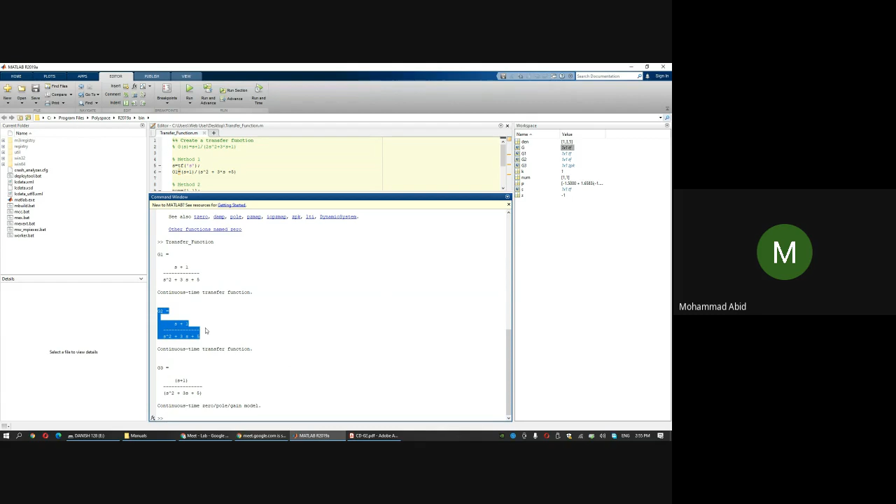If I run this, you see G1 using method 1, again the same transfer function using method 2, which uses the coefficients of numerator and denominator. And another transfer function which is again the same, but this time using a continuous time zero-pole-gain model, meaning I gave MATLAB the information of zeros, poles, and gain. Then I used the command ZPK, and MATLAB created a transfer function named G3, which has the same numerator and denominator coefficients.

You can also see here the variables stored on the right - the gain is 1, here are the poles. If I write P, the poles of the transfer function are complex conjugate: -1.5 and plus minus j something. And there's also a zero at -1. So this is how you define a transfer function.

I have told you 3 methods. One is straightforward for a simple equation, you just need to be careful about the brackets. Second method uses coefficients, and in the third method, if you have zeros, poles, and gain information, you can get a transfer function using that.

So after having a transfer function, you can plot a number of things about the system. Because the transfer function is known, it creates a lot of convenience for us - since the transfer function is known, you can check anything about the system. Let's plot some things.

Let's create some plots for the transfer function, and we can use any one of them - G1, G2, or G3. Let's create some plots to see the various dynamics associated with this transfer function. For that, I will create a plot, but within that plot there will be many smaller plots, so I'll create a subplot.

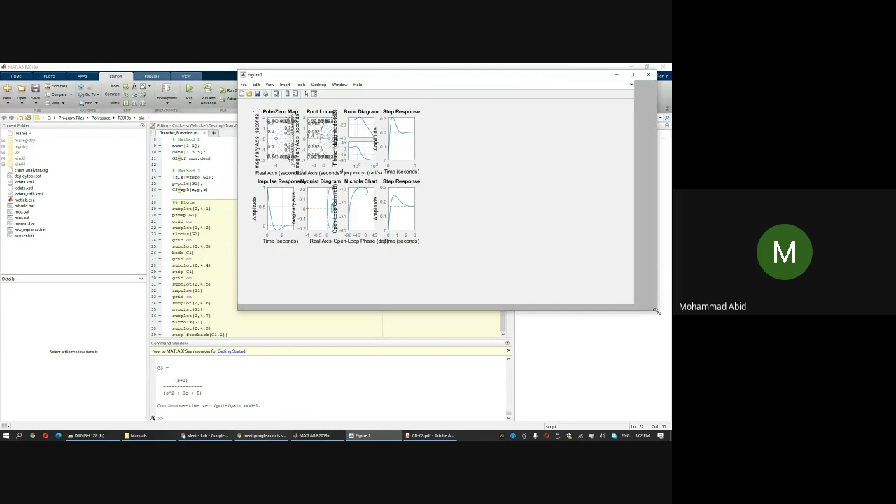Let me just run this first. Now you are seeing basically 8 plots within a plot. I have plotted 8 plots in a single plot, that's why I said 2 rows and 4 columns. See, when you know the transfer function, you can plot a number of things straight away from MATLAB.

I will just zoom it a bit. The first plot you are seeing is the pole zero map, which I had shown earlier - 2 poles are here as crosses, and you are having 1 zero. This is basically the real axis sigma, and this is j omega. So you can see this is the 0,0 point here. MATLAB has plotted the poles and zeros on the complex map.

This is the first. Second is the root locus. Root locus is basically the plot coming from this as we vary the gain k. So this is the locus of the 2 poles. This green is the locus of 1 pole.

This is moving from here, then going to here. Sorry, the locus should start from the open loop pole, this one. Then it moves along this green path and goes to infinity, left infinity. And the second pole, which is up top, it comes down and it's going towards the zero. This is the root locus for varying k.

The third plot is the Bode plot, which we have discussed in lab, of the same open loop transfer function G1. This is the magnitude plot, this is the phase plot for running frequencies.

The fourth plot is the step response. MATLAB has used a step input for the system, and it has plotted the step response. From the plot you can see certain things about the system. This is amplitude versus time.

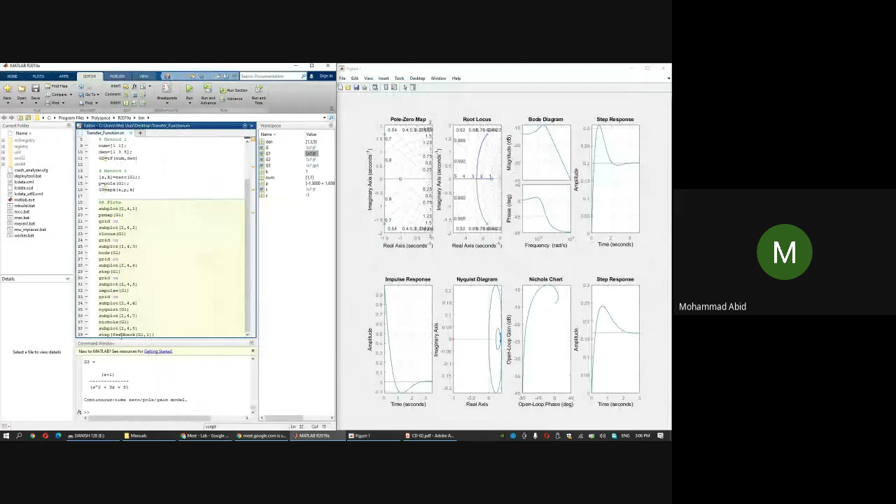It's used like this, feedback. The first argument is the transfer function jiska aapko feedback lena hai, and the second argument is the value of the feedback that you want to give. Yahan pe maine 1 liya hai, which means it's a unity.

Let's suppose aapko feedback mein you're having another transfer function, which is h of s, jo hum likhte hain na in the block diagram. So h of s will come here, and g of s will come here. And by default, MATLAB uses a negative feedback. It provides a negative feedback, but you can change it to positive also. And this function feedback closes the loop.

Aur uska, ye jo maine highlight kiya yahan pe, feedback of, let me just grab this and write it here. This is the transfer function of closed loop system, and G1 was for the open loop system, jo open loop ka tha, with unity feedback negative, it becomes this.

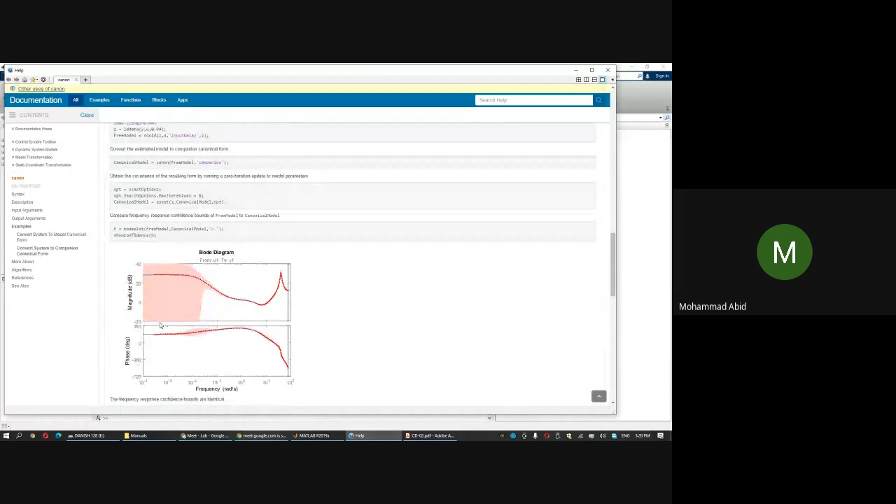And this is the second companion form that I was talking about. Second companion form में diagonal में zeros रहेंगे, sub-diagonal में 1 रहेंगे, and the coefficients of the denominator will be stored on the last column. This is the second companion form, और वही हमने use किया. If you want to extract the first companion form, just take the transpose of A.

Isn't it? So मैंने system 2 बनाया था ना. System 2 was second companion form. And if you want to see just the A, you write the command sys_2.A. This will just tell you what is the A inside the system 2. And if I transpose this, let's say .A, and I just give it a transpose command.

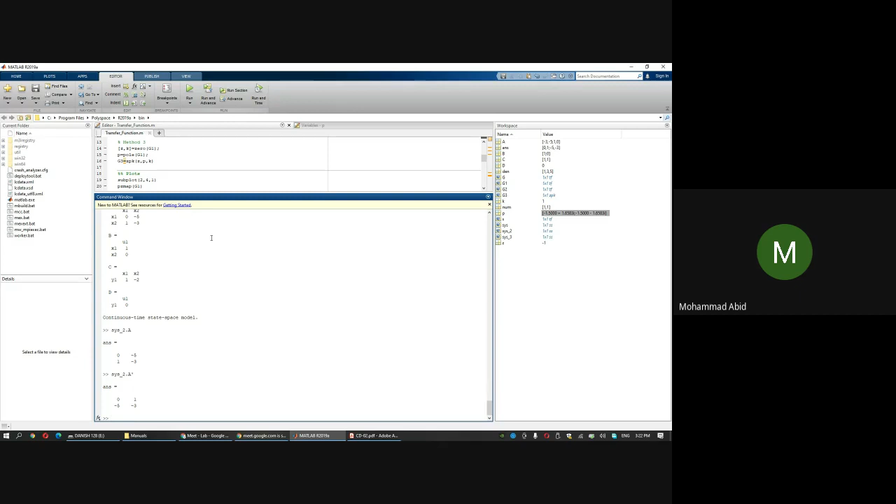See, this is the first companion form. So you have seen this property that first companion, second companion basically complement each other. So you can derive any companion form. You can derive the modal form. और मैंने आपको दिखाया था command for eigenvalues. Simply eig of A. Or if you see a detailed description of this eig command, it not only gives you the eigenvalues, it will also give the eigenvectors.

Its general presentation जो मैंने शायद आपको कभी क्लास में दिखाई थी, this form: [V, D] = eig(A). If you have any matrix A और आपको eigenvalues और eigenvectors निकालने हैं, just use this command. So in V, it will store the eigenvectors, and D will be basically a matrix. और उस matrix के diagonal पे आपको eigenvalues मिलेंगे. V will be a matrix, उसके columns जो होंगे, that will be eigenvectors.

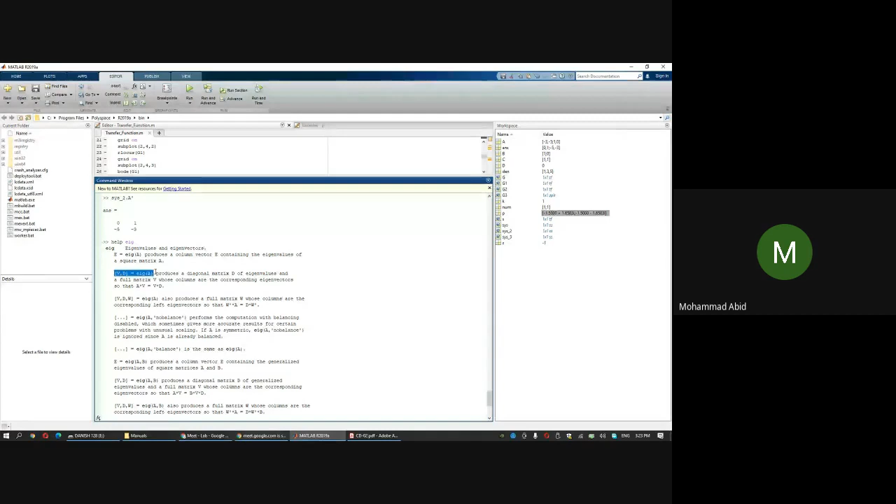And these V, D, and A follow this relation: AV equal to VD. जो हम पढ़ते हैं ना, A small v is equal to, वहाँ पे usually हम लिखते थे lambda v. But mind you, यहाँ पे this matrix vector cannot be producted, इसलिए यहाँ पे V into D लिखा गया है, because both of them are matrices. वहाँ पे lambda is a scalar, but यहाँ पे lambda is stored in this D. Let's suppose we use this command, मैंने ये command copy कर ली.

See, जो V है, the first column is an eigenvector corresponding to this eigenvalue, जो कि pole है पहला. और जो दूसरा column है of this V, that's another eigenvector corresponding to this pole. In theory, we write this D as lambda, but MATLAB stored it as a matrix, and the matrix के diagonal terms में eigenvalue store रहते हैं. ठीक है? This is a simple thing to do.

एक और चीज हम कर सकते हैं, because we have the state space model stored in a number of ways, system 2 and system 3. अभी पढ़ ही रहे हो controllability and observability, है ना? तो controllability observability आपने पढ़ा. This is the command: ctrb, short for controllable. If you run this, see, this is the matrix. This is basically B and this is AB. For 2 by 2, this is your controllability matrix.

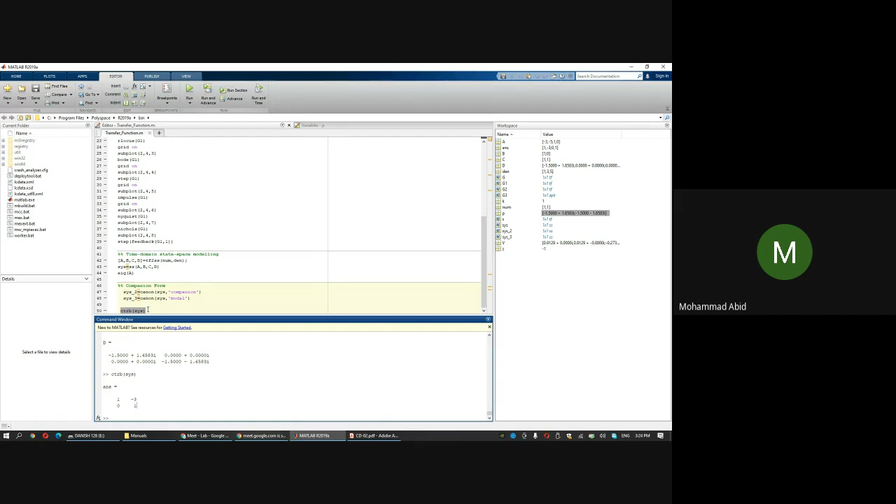And when you talk about the test, let's suppose I ask you, is this system controllable? कैसे पता चलेगा? How do you find the controllability test of a system? Controllability Gramian and controllability matrix, या फिर eigenvalues, there are basically n number of ways to do it. सर ने आपको 2-3 तरीके दिखाए होंगे to find the controllability observability test. A simplistic way is by checking the rank of this matrix.

Or in a better way, if I just store this in C... C is already taken for the C matrix. आपको ये ध्यान रखना है MATLAB में, variables should not be overlapping. Let me just take it as CP for controllability matrix. Okay, and OB. This is the command for observability matrix, obsv, of the state space model.

So when I run these two commands, you will see the CP, and I'm just uncommenting this ताकि ये आपको दिखे. See, this is your controllability matrix, this is your observability matrix. To check whether the system is controllable, you just check the rank. If this matrix is full rank, having independent columns or rows, it's passed the controllability test. In MATLAB, we use rank of the matrix CP, and for observability, the rank of OB. If the rank is 2, it's controllable, and if the rank of OB is 2, it's observable.

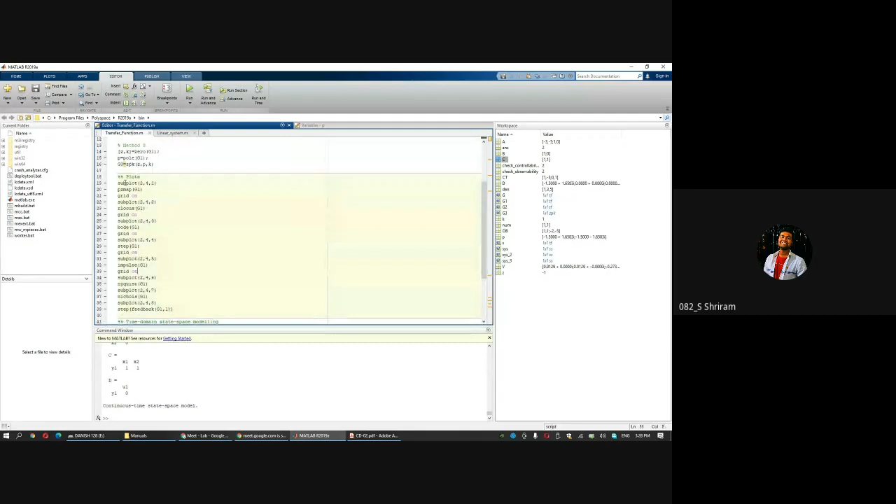See here, I'm saying MATLAB to create a figure and divide that figure into 2 rows and 4 columns. See, 2 rows and 4 columns. Do you understand? And this is the first plot. So 2 rows, 4 columns, and the first plot should be PZ map, which is here.

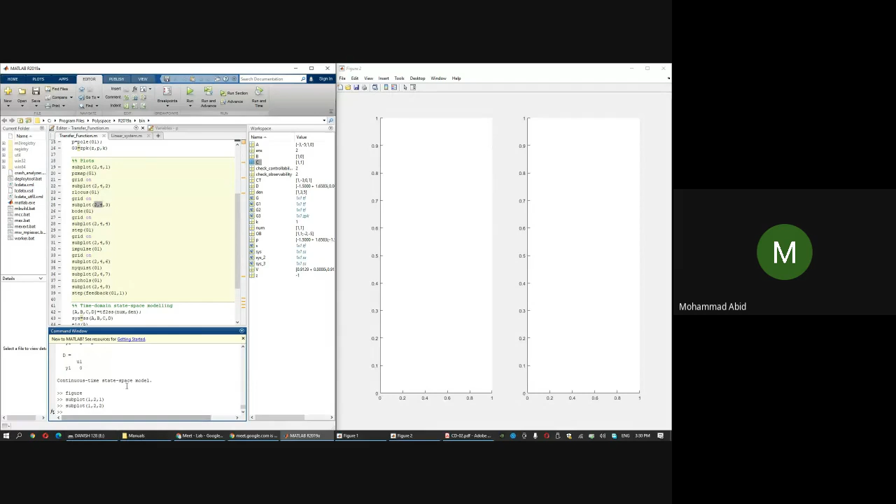If I write now second entry, take the rows as we take rows and columns in a matrix. So this corresponds to the number of rows and this corresponds to the number of columns. And the total number of elements, that's the product of rows and columns. And this last entry determines the element number. Subplot 1 2 creates a figure like this, left and right. Left and right is 1 row and 2 columns.

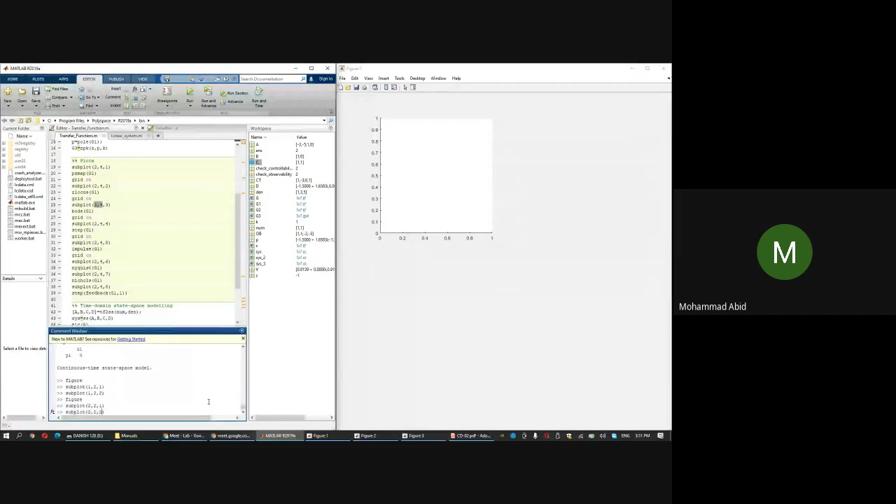Sir, basically length of axis. You can also take it as length of axis. See, in order to visualize, I have to show you some. Let's suppose 2 rows, 2 columns, and 1. Let's say figure 1, and then 2. Let's suppose 3. Let's suppose 4. See, I've created a plot with 2 rows and 2 columns, which means 4 plots only. 2 and 2. Understood?

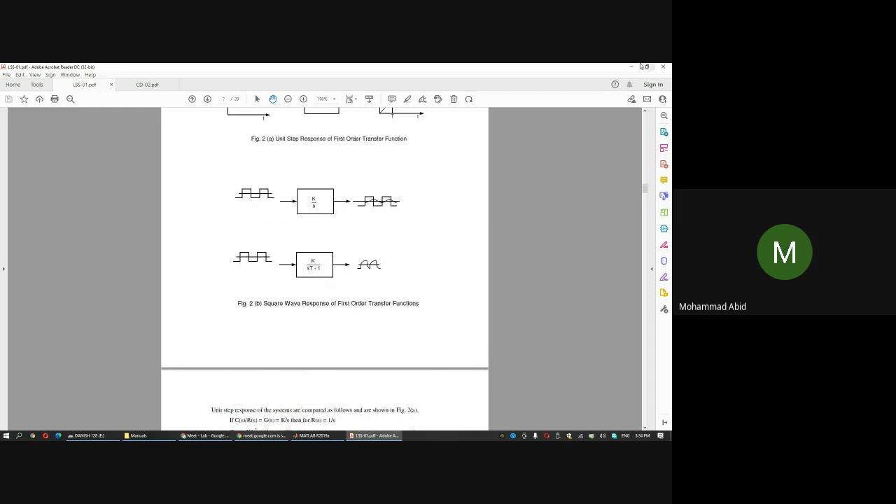See, you know how to create transfer functions now. If I simulate this, first of all I have to store this transfer function k upon s. So how will you make this k by s? Let me use method number 1 जो मैंने दिखाया था। ये रहा आपका Laplace variable, and instead of k I would have this k1 and this I would have k2 ताकि ये different चीजें हैं। Let me just store this k. This is a scalar, I can store it by any number, let's say 0.3.

Okay, now let me just create a transfer function by the name system1, and the transfer function is simply k1 upon s. I personally also prefer to use this kind of method for creating transfer functions. It's very simple. आपको बस एक Laplace variable store करना पड़ता है s, then just simply write the equation. जो equation रहती है उस equation को replicate करना है.

Okay, और इससे पहले we will just clear everything and close everything. And this is a good practice. जब भी आप कोई नया code लिखो, just clear the previous variables already stored, or close any figure, or clear the command window. This is just for clearing things first. Then I start with these lines. और साथ I will just write the comment, create a transfer function. So ये तो मैंने create कर दिया system1.

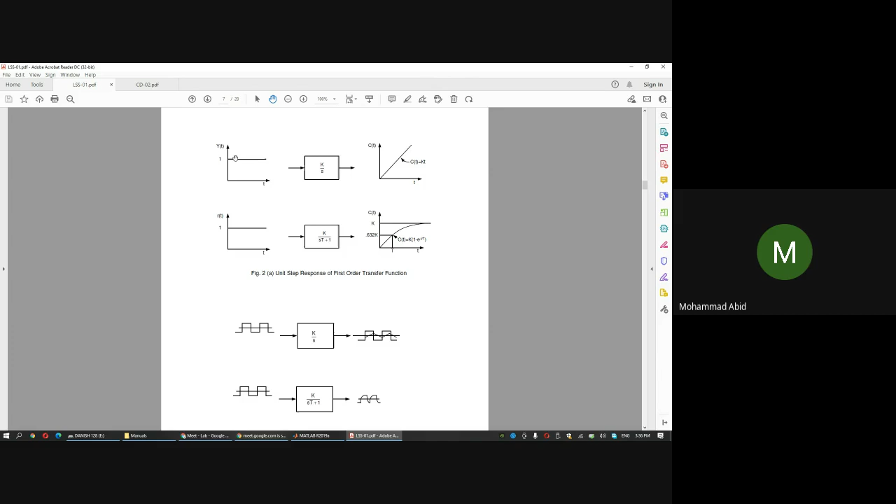What I will do, I will use a command here. What I can do is I can just plot the step response. मैंने आपको दिखाया था step response is plotted by using the function step. अगर मैं step command दूंगा, I will see a function like this. Let's try. Let's save this and run this. See, similar output, it moves like a ramp.

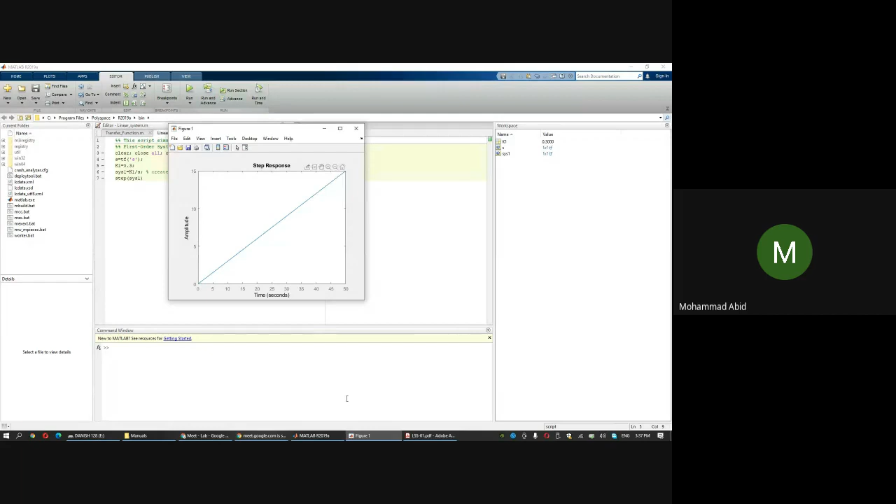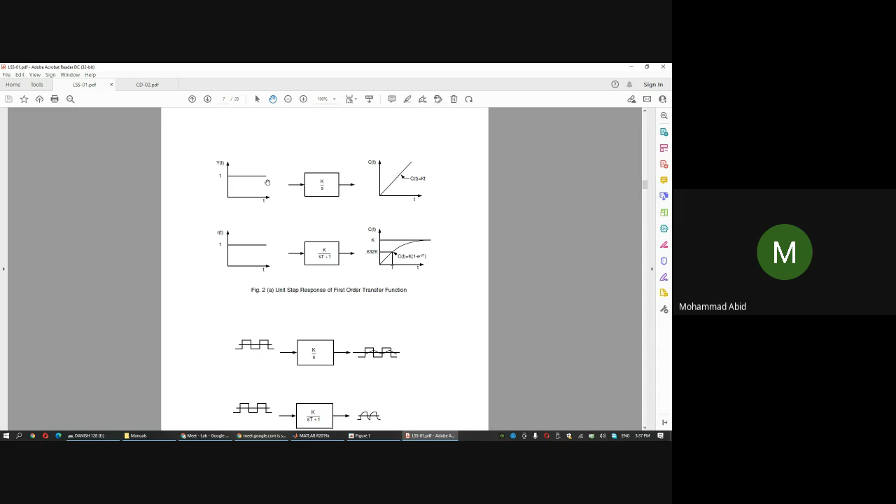लेकिन हमने लैब में we didn't provide a step input. हमने step input नहीं दिया था. To simulate a step input, we used a periodic square wave. ताकि आप यहाँ पे खाली rising edge देख पा रहे हो. But जब negative step आएगा, इसमें एक negative step भी आ रहा है ना, the value goes minus kt. So this has to fall then. तो वो pattern देखने के लिए you have to provide a positive step and a negative step simultaneously. So let's simulate that scenario. See, let's remove this line.

I will first create a signal, because MATLAB does not store a square signal by default like a step. You have to create that square signal first. I will use a command GENSIG, which means generate signal. There is also a block in Simulink, or you can simply use the code GENSIG.

It has various arguments. The first argument is the type of signal you want. I want a square signal to be produced, and then it follows the further arguments. If you type help gensig, it will tell you the extra arguments. See, for type you can have a sine, square, or a pulse, and I'm using a square. Then you have this tau. For extra information, you can go to the reference page.

See, if you want to create a square wave like this, just write the square term. 5 is basically the time period. See, after 5 it's repeating. 30 is the total time that you want, and this 0.1 is basically the sample time, after how much time you want a new value. He's using a sample of 0.1, so every 0.1 seconds he's generating a point on this.

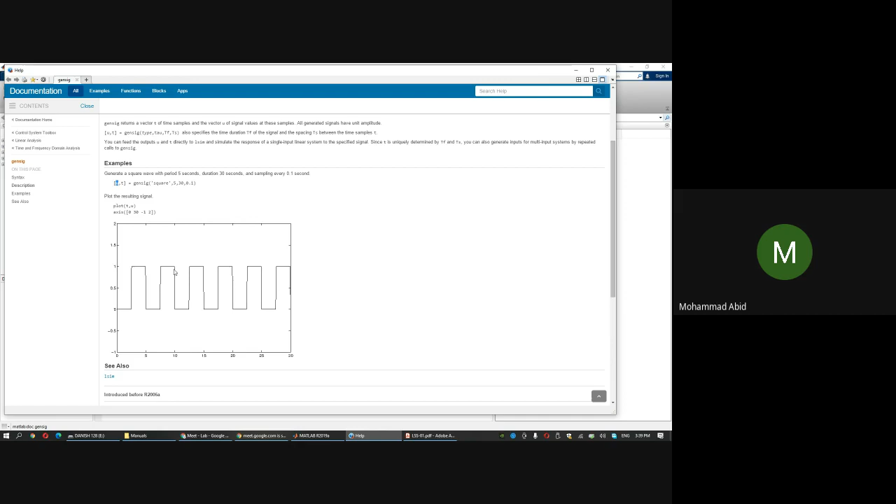So once you have this command, you can use this u now. This u is basically the amplitude. So let's use this command. Let me create a square, a more fine square. For the signal, let me just use y comma t, and I will terminate this. In the comment, I will write periodic square wave, to visualize it.

Then let's take another system, this one. Before that I have to create k2. Let's suppose k2 is some random constant; we will change it later. I have also stored the constants k2 and T. Let's suppose t is 0.4. Now I will create system 2 with the transfer function k2 upon s into T plus 1. But you have to keep it in brackets; this is the numerator, this is the whole denominator, and s is small, not capital S.

So the periodic square wave we made, you will feed it to both the systems. Let me just grab it and move it up. Here I have created my system 1, and here my system 2. It's a good practice to rename everything in your code, so that when you give your code to anyone, they can replicate it or understand what is happening in the code.

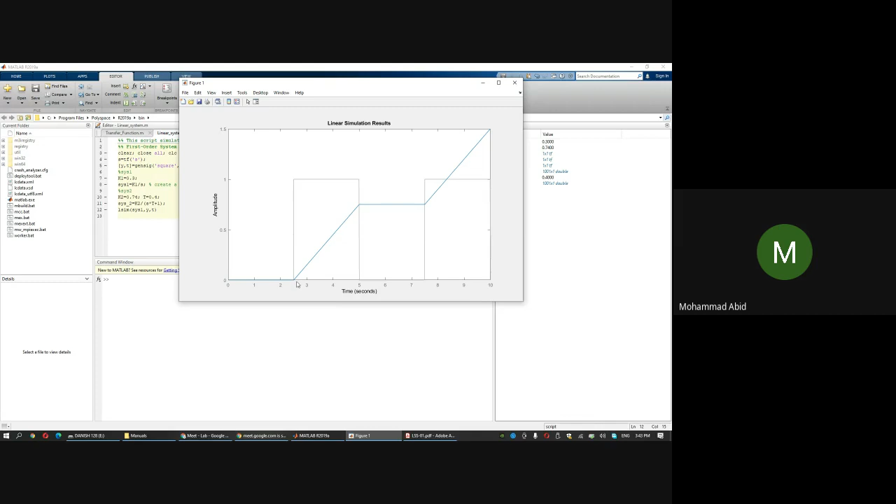This is not as expected, because the input, in gray, goes from 0 to 1. Basically the input is not switching; it stays positive, 0 to 1, then going to 0. The input should go negative as well, to -1 also. Then this will drop. So a small adjustment is needed.

Let's suppose 2y minus 1, I'm just multiplying it with 2. It's basically doing an amplitude change. See, what I have done is I have forced it to go from 1 to -1. Abhi tak ye 0 se 1 tak ja raha hai, so I have 2 times increased its amplitude, and this is the input. And just like oscilloscope is updated, this is basically this.

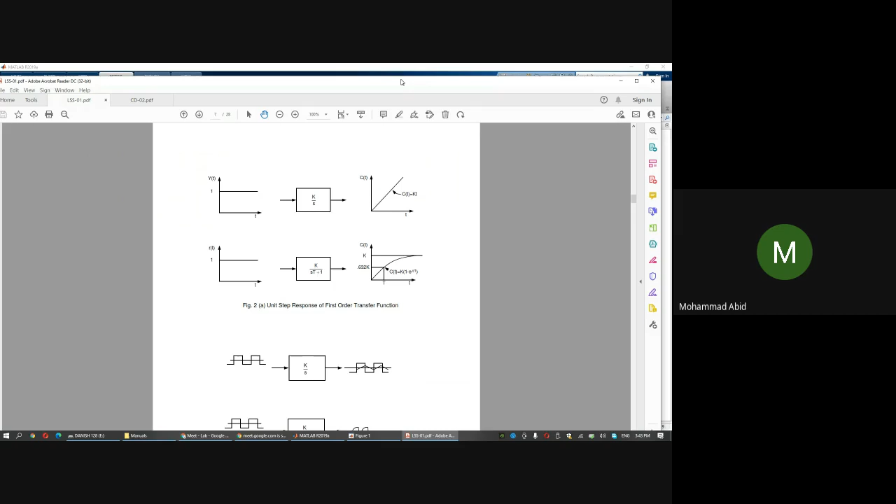Ye dhyan se hai. So we simulated the k/s transfer function, and we talked about this effect of k. Ye jo transfer function is k/s, it has no T part. This is just an integrator, and you can simulate the effect of k here.

Let me show you how. Yahan pe le lete hain isko. Yahan you have running parameter k, kyunki system 1 mein k hai na. You can just right click on it, or this k1 maine 0.3 liya hua hai na. System 1 k1 is here.

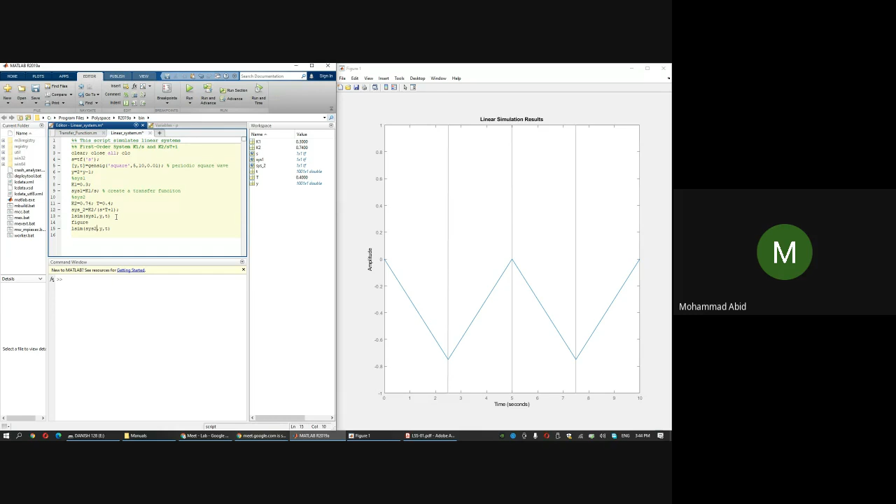Let me do one thing first. Before I run it for multiple cases, let me just simulate system 2 also. System 2 ko bhi simulate kar lete hain. So I will copy this line, paste it here, and create another figure. Separate figure lenge, usme system 2 ko simulate kar lete hain. Theek hai? So run this.

See, when you are having a common error, toh error aapko command window mein dikhega, and you have to interpret the error. The error says there is an error at line 15, which is this line. It says undefined function or variable system 2. There is no function by this name. The function is sys_2, so I have to use this. Okay, this is how you interpret errors and correct them.

Isko run karte hain. See, I have two figures, and this is here. Humne dekha tha lab mein first order systems of two forms, integrator and K upon sT plus 1. So a decreasing trend, then followed by a positive trend.

And now I will just form this effect of K and T. Mere paas jo second transfer function hai, usme do unknown, do constants hain, K2 and T. See, if I do one thing, I will just change this K2.

Wait. I will just grab this value, jo maine 0.7 randomly use kiya tha. I will just right click, increment value, and run section. Ye jo command hai, what it does is, agar aap click karoge, you will get a block like this. See, it has a number, currently it's 1, and you're having this plus minus. If I press plus, it will add 1 to this number. 0.74 plus 1 will be 1.74, and it will evaluate the whole thing.

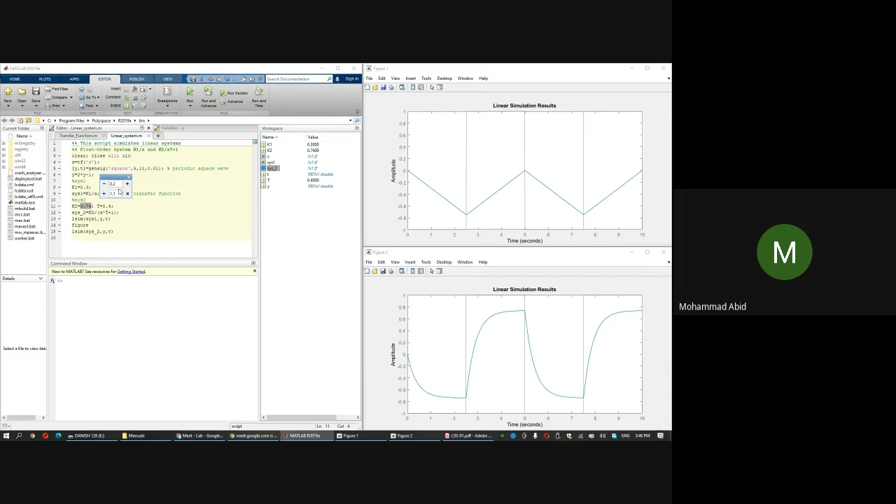But I'm not evaluating at 1. Main isme add nahi karunga 1, but main just add it 0.2. Small increments dete hain, theek hai? I will just increase this K by 0.2. Isko band kar lete hain. I'm just concentrating on this figure.

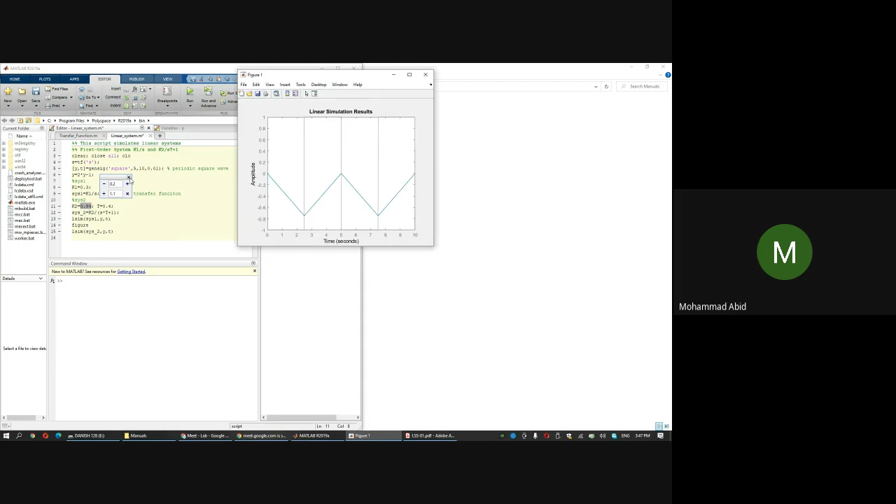See, this is your figure. If I increase this again with 0.2, it's giving me again a separate figure. See, why is it giving me separate figures? Okay, because I'm using LSIM twice. Let me just close this first system.

I'm concentrating only on the second system. Okay, isko main phir se le leta hoon 0.5, and see, this is your figure. And now if I increase my K, you see the amplitude is increasing, isn't it? Jitna main K badha raha hoon, its amplitude is increasing as expected.

But yahan pe jo main more interested hoon, that's on the steady state error, and I'm more interested on the rise time, theek hai? For that we will not change K, we will change this T. This T is used here.

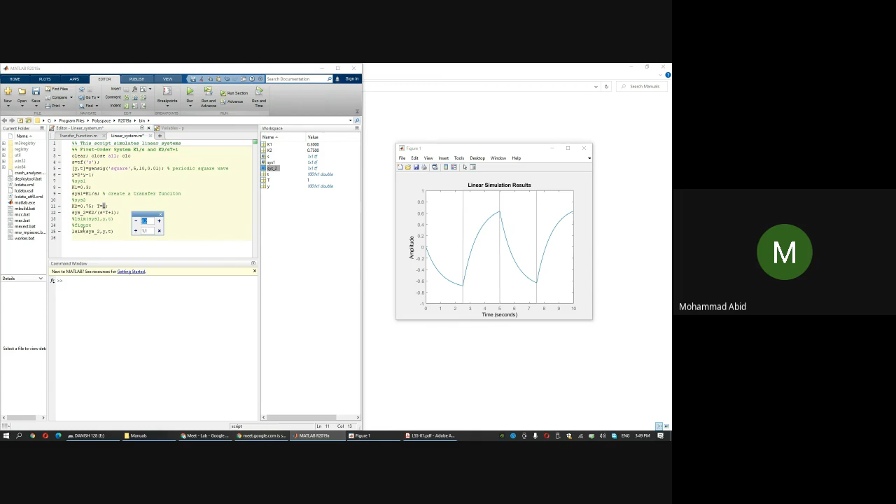Generate a signal Y, K system, then KT, then system 2 is being created, then LSIM system 2, Y comma T. See, I will just decrease this T.

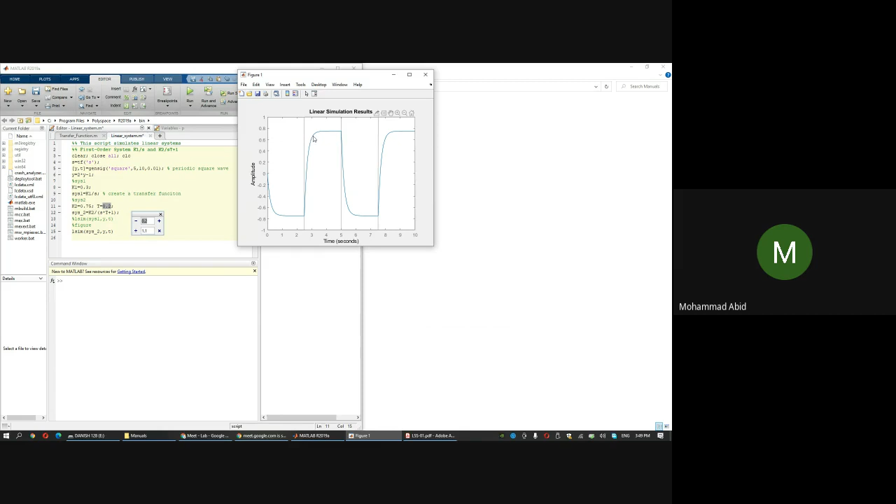And you will see as I'm decreasing this T, this is becoming a step input. Sorry, this is following the input. So as T goes down, the steady state error will go down, and the rise time, if rise ho raha hai na, it will become much faster. This was what I observed here. See, if I show you this table, yahan pe kahin pe toh table tha.

I'm simulating this scenario by increasing k or decreasing tau. If you decrease tau, you will see the steady state error is decreasing. This will show you that as we decrease tau or increase k, your system will follow the input, because this is becoming the input itself. So that's what's happening here.

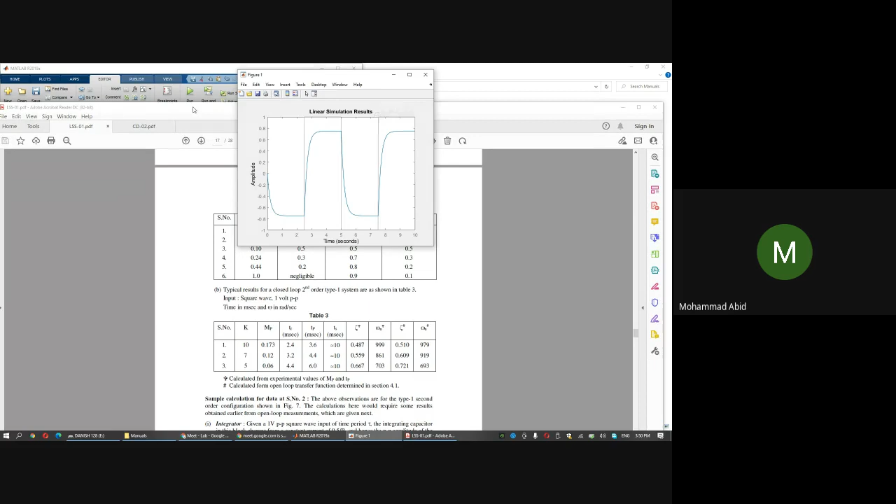See, for very small t, here t is 0.2, and when I decrease this, t becomes 0. So I should not have used 0.2, I will use 0.02. We decrease it in small increments.

See, as much as I decrease t, this is becoming the input. And if I decrease it a lot more, it exactly becomes the square wave.

And similar is the effect on k. Here the inputs and outputs are not matching because k is less. If I increase this k, its amplitude is going up, and it will become exactly the input for some k, which is 1. So as I'm approaching k equal to 1 and t equal to 0, that's making it a square wave basically.

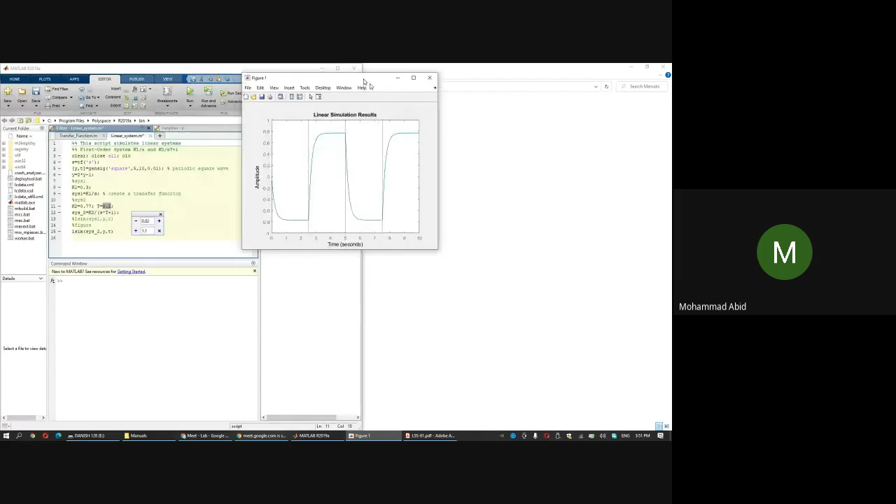And for some generic k and t, let's suppose this is the thing you observed in the oscilloscope. So when you're having some tau, this will be the time that will be taken. Here you can work on this. You can check the peak response.

No, you would see that in step response, because here you're having a periodic signal. And I had told you during lab that we only focus on one cycle. Whatever happens in one cycle will repeat in the rest of the cycles. So instead of LSIM, I could also do a step response of system 2.

Okay, this is basically just a single cycle. In step response, we just give a single cycle. So now if I decrease t, you'll understand it better here.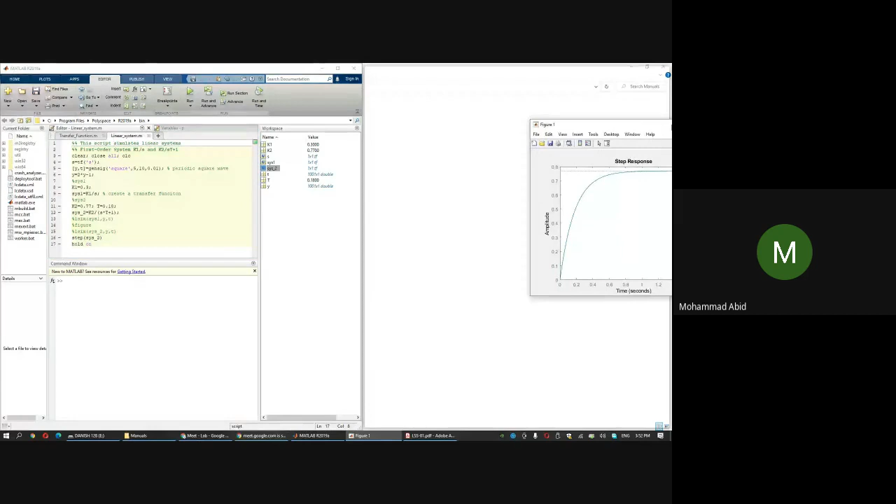If I decrease t, see, I'll use the command hold on, and I will just decrease my t. This is becoming more like a step input. At the end, it will become a step input for tau equal to 0. This is what we observed.

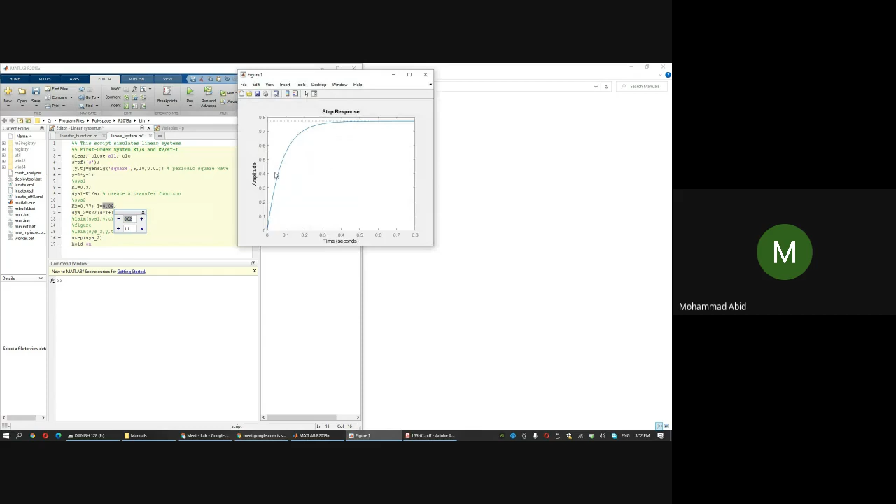Okay, moving on. This was just how do you increase or decrease a variable and run the entire code. You don't have to manually change t and run each time, you just have to increase or decrease the value. That's what I was doing here. Let me just go back to the t that we used.

I had taken 0.4, I guess, and k2 I had taken 0.74, I guess. Okay, so this is the LSIM command, or you can simply use the step command.

Okay, let me just go to the second order system quickly. A second order system can be defined in a number of ways. Either you define zeta and omega and then write the transfer function, or you already have system 1 and system 2. If I do the product of those two, I'll again get a second order system, because these are both first order systems.

And that's what I will do. I will create a system by the name system 3, and that will be system 2 times system 2. I already made a system, system 2, which is already in this form, and again system 2.

So the product of those will be a second order system. Let me run this line only. See, this is your second order system, product of those two, and K2 remains the same in both. Let's simulate this system 3 now using the same LSIM command.

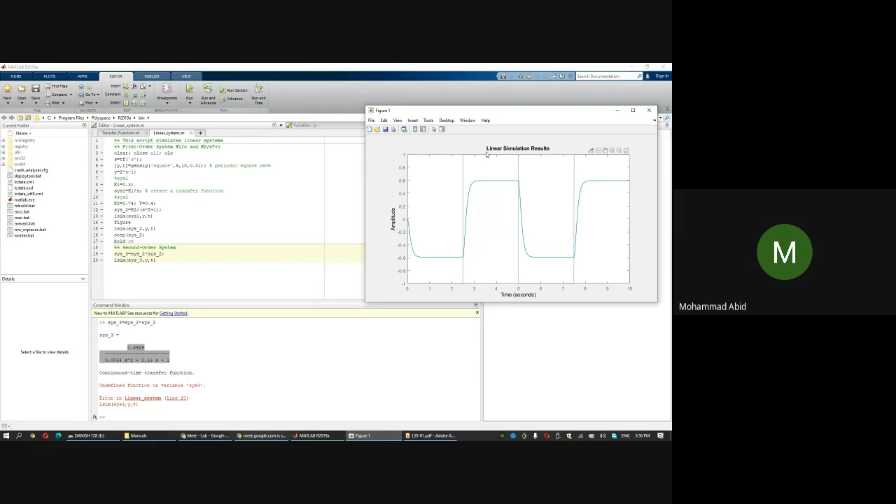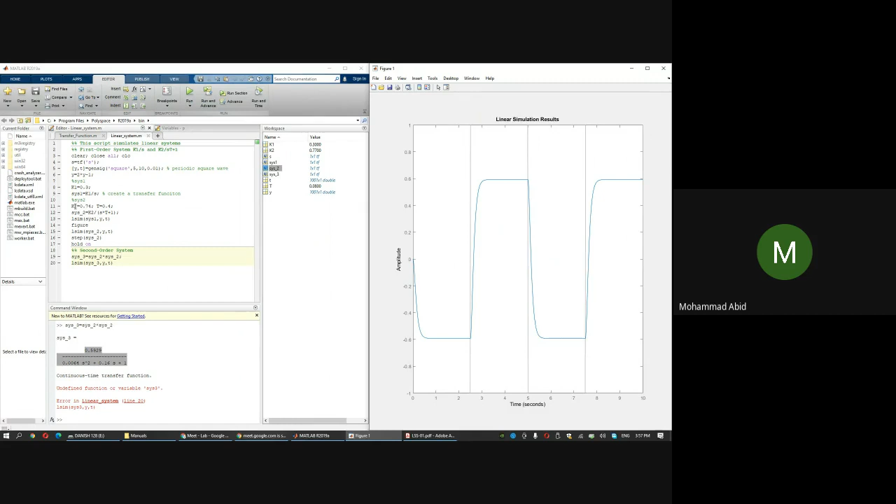And the reason is this K - the K is very small. Because in the transfer function, we took the product of system 2 and system 2 for this K. See, if I just increase this K, I will show you.

Let me increase the K2 involved here. Let me just increase this to 5 and run this. Wait, again there is some error.

It says plots must be of same type and size to be superimposed, and this is in line 20, which is this. Let's do one thing - the old plots, let's comment them out.

This is the first plot, this is the second - let's close this one too, close this one too, hold on command to close this as well. This is also a plot. Let's leave the system 2 simulation as is. System 3 is here, and system 3 y, t.

Just run this. This is with K2 is 5. Again, I'm not seeing any oscillation.

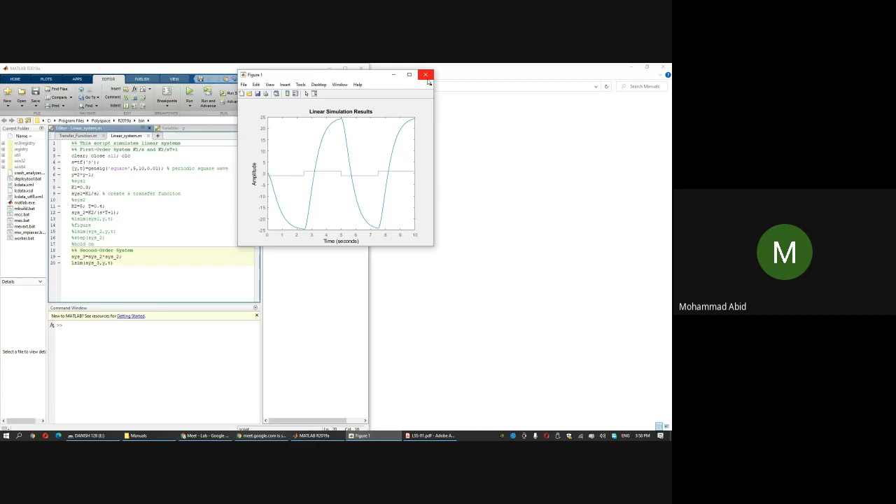The reason is K2 is 5, and T is what? How much T have we taken? T is 0.4. Let me just change this T also.

See, I've just grabbed this here. I'm moving this here. And system 2, this one, I'm also moving it here.

And K1 is not needed. K2 is 5, T is 0.4, and I'm just producing system 2 with system 2. And yeah, there's one more thing.

What we are simulating - there's one question you should have asked: whether it's an open loop or closed loop system. It's basically an open loop.

When I simulate this system into system, that's a second order system, that's open loop, and you cannot expect oscillation in it because there's no feedback. So in order to give feedback, I will use the command feedback of this whole thing.

Let me write this - feedback of system 3 with unity. And I'm representing this as system 3 CL, meaning closed loop. Now let's run this.

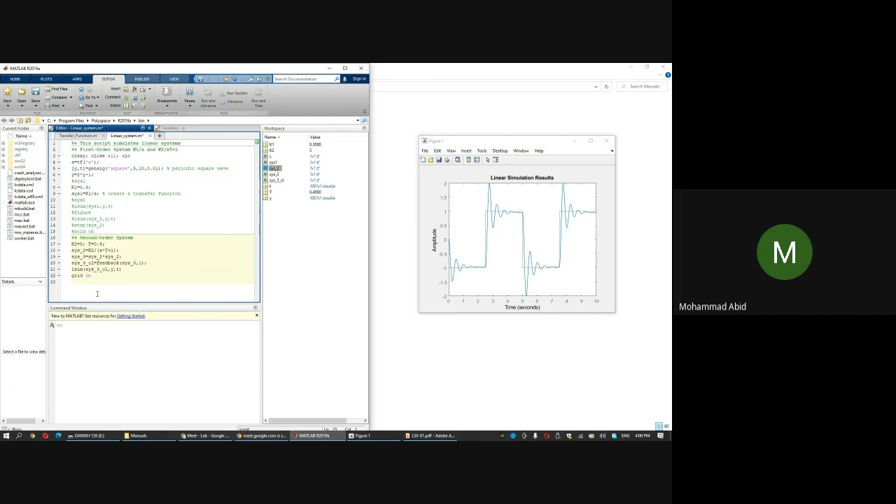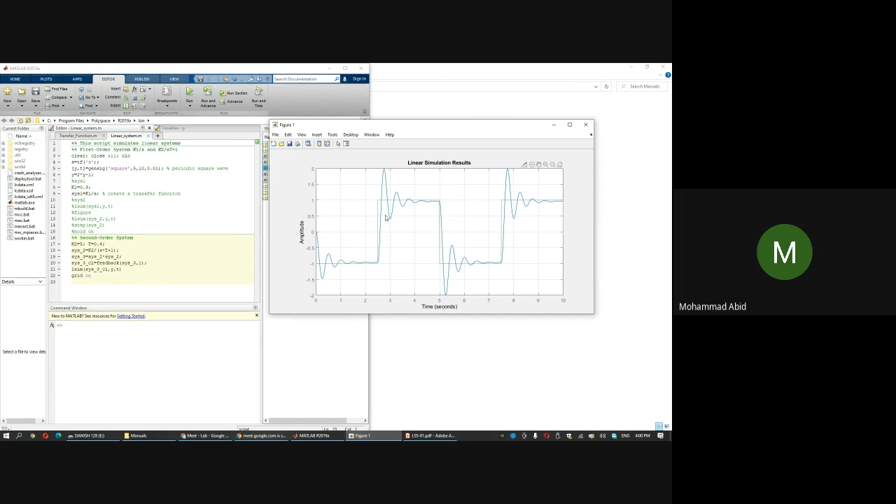Not only because of the feedback, there are two reasons: one, the gain we had set was different, and the reason was also because of the feedback. If you simulate the open loop system, we saw - I will show you both the transfer functions.

Let's take this here. This is system 3 without any feedback, and this is the closed loop with feedback. It will be different - the denominator polynomial will be different.

Look at this term here - this corresponds to what? This term is omega n squared, isn't it? Here the omega n squared term has 1, and here the omega n squared term has 26. And you know omega n squared is basically the natural frequency of oscillation.

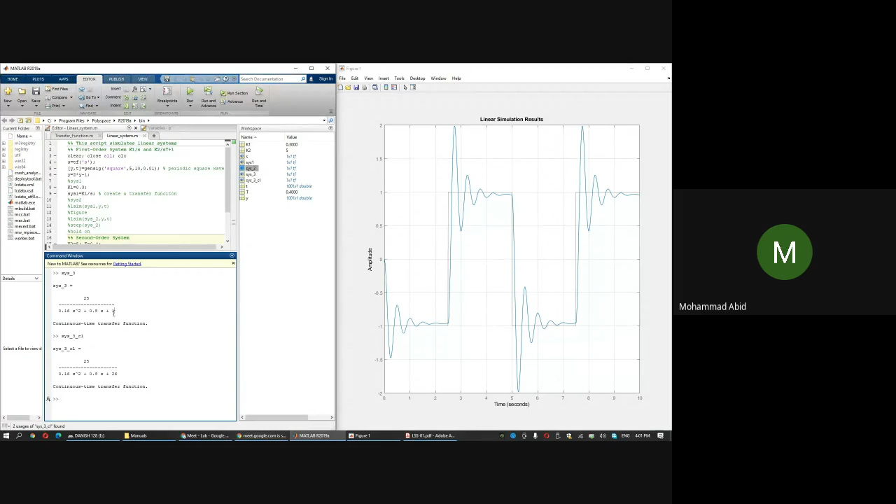So these two systems will be different - this one will have a slightly higher value, while the other will have almost no value at all. That's why when we simulated this one, there was no oscillation. And in this one you can see oscillations corresponding to this value 26, which is here. So the plot I showed was for some periodic square wave.

अगर आप simply एक step लोगे, instead of LSIM, if you simply do a step of system 3 closed loop and run this, it will show you a prototype second order system for just a positive half of the signal. And यहाँ पे MATLAB में जब आप plot करते हो step function or step command, you can calculate various things. Oscilloscope में जब हम measure किया करते थे peak time, rise time, overshoot, steady state, used to measure it from the grids or the values जो oscilloscope पे रहते थे.

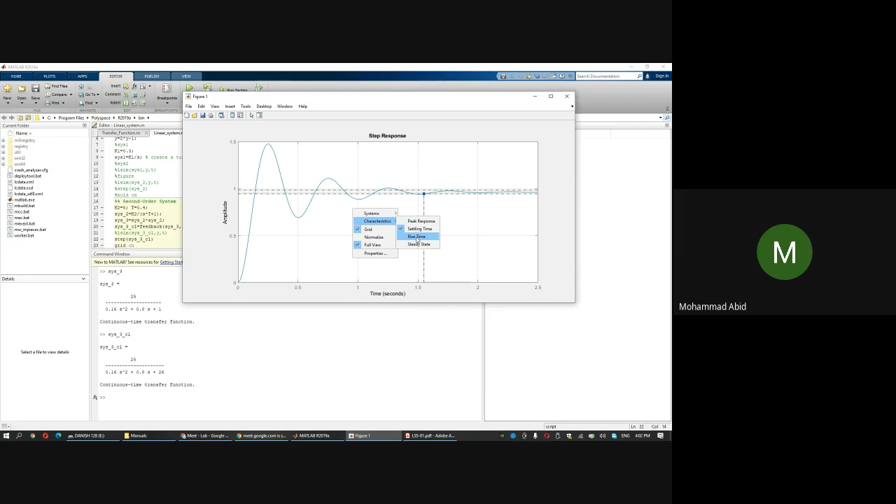यहाँ पे in MATLAB you can just right click on the figure, go to characteristics, and you can just see any one of them. You can see, let's suppose, settling time. It has a settling time of 1.55 seconds. Similarly, if I just open rise time, if I open steady state, if I open everything, see, this is your rise time, 90 milliseconds. This is your peak time, 0.25 seconds. This is your settling time, and this is your final value, which means the steady state value.

The steady state value is 0.96, which means इसमें कुछ error है, because we're comparing it with 1. As compared with 1, it has some little bit of 4-5% of error. Okay? This is how you simulate first order system for any periodic input or a step input, or you simulate a second order system. And you can simulate both in open loop and closed loop. For closed loop, you just have to type this command feedback to create another transfer function. Then do the step of that. So this is how you simulate it and how you can check these values.

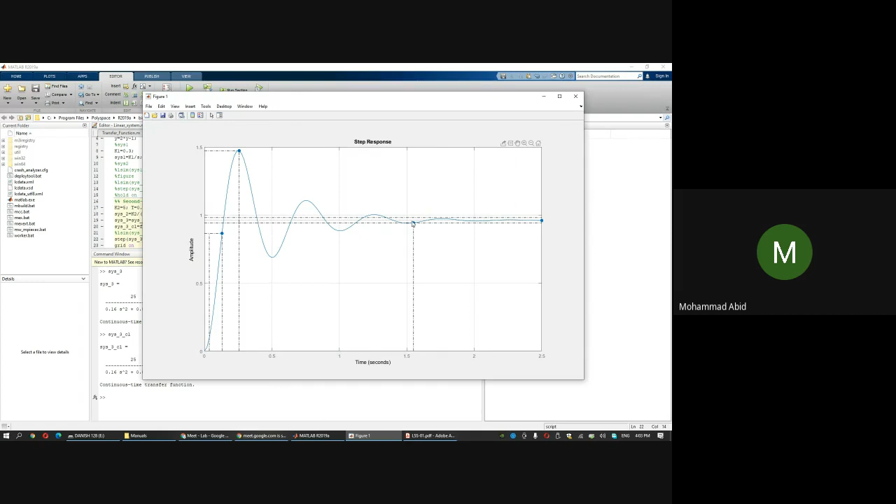Okay. Now, अभी तक तो जो हमने किया, that was some basics. We will do एक last script बनाते हैं. One more script. And यहाँ पे थोड़ा हम आएंगे on the control itself. अभी तक हमने कोई control नहीं किया. We didn't provide any control. अभी बस हम system को analyze कर रहे हैं. We are analyzing transfer functions. We are analyzing state space models. We analyzed first order and second order. अभी तक design में नहीं आए. क्योंकि जो last experiment था, that was most important experiment. It was design a controller to modify the behavior of something. Let's suppose यहाँ पर हम एक final script ले लेते हैं, and what I want is I want to design something. और जब मैं last time use किया था, that was lead and lag.

आपने वो वीडियो देख लिया है? Has every one of you watched the video for design or not?

See, हमने जो last time वीडियो experiment लिया था, उसमें we took some design criteria in mind. We took the design criteria of, if you remember, 5% steady state and 40 degrees of phase margin. See, these things will make sense only when you know these things. और ये चीजें मैंने revise कराई थी in lab. So if you haven't watched it, I suggest कि जब ये वीडियो मैं अपलोड करूंगा, just first watch the video for the design, then you see the script, क्योंकि तब आपको समझ में आएगा कि चीजें क्या हो रही है. And I will save this by the name closed design on desktop.

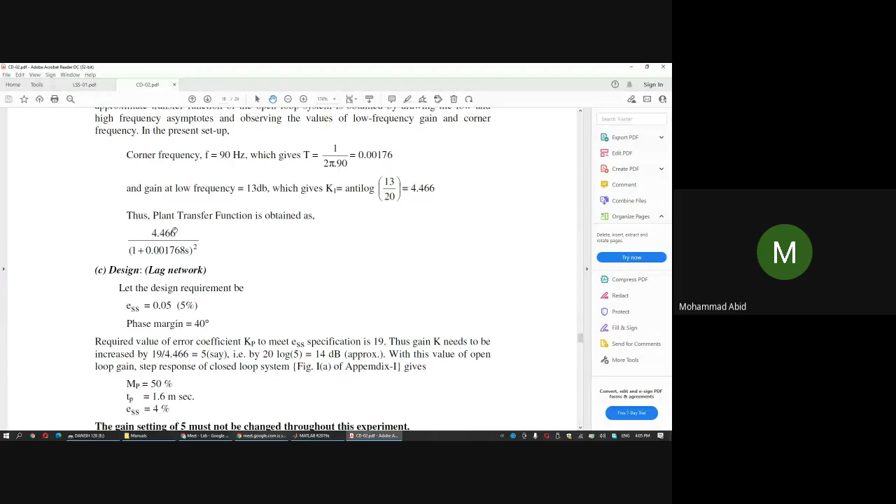The value is this 4.466 upon 1 plus. This is second order system type 0. तो इसके लिए हम डिजाइन कर रहे थे. So let me just write this transfer function first in MATLAB. Going to MATLAB again. I'm just writing this transfer function. So again I will just first clear everything, CLC, and I will just close everything. Okay. And I will create the transfer function by the name system. That's 4.466 upon 1 plus 0.001768 into S. You have to take care of every notation.

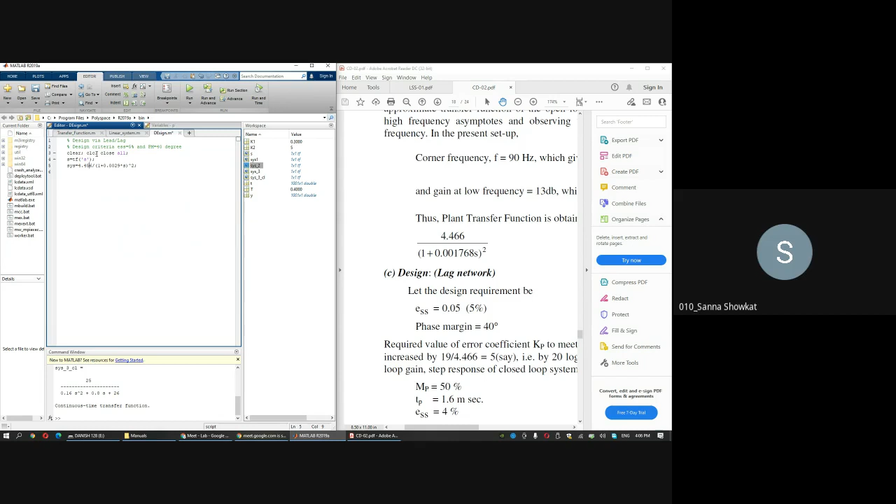And what I want before you go to design is to know the system. Before you design a system, the first step is to analyze the system at hand.

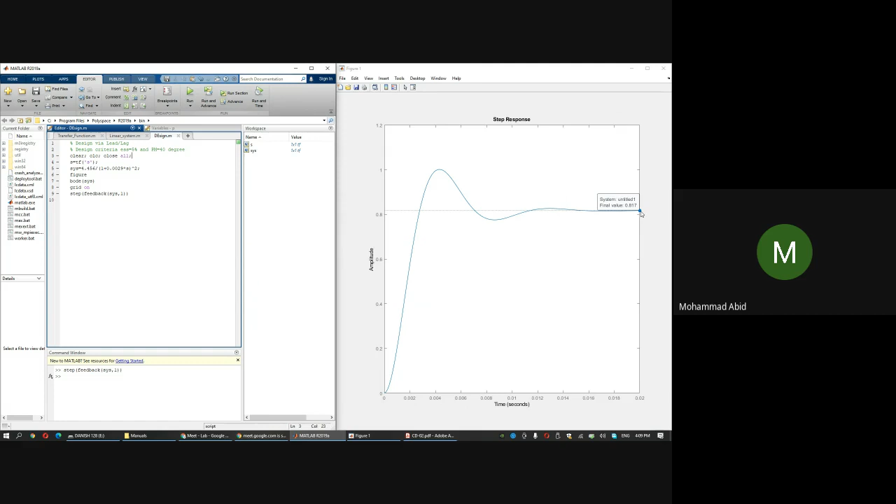But in my design, I want the steady state error to go to 5%. 5% error होगा if final value had been almost 0.95, isn't it? 0.95 पे आपको 5% मिलेगा. So this has to go up. And another design is I want my phase margin to be 40 or more, क्योंकि phase margin system में जितना होगा उतना अच्छा है. So I want it at least to be 40. 40 से कम नहीं होना चाहिए. This is my design criteria.

And to begin with, यहाँ पे मैं लिख लेता हूँ. जो system है, system has 56 phase margin and final value of 0.817. तो ये जो चीजें हैं इनको हमें modify करना है. ये system की inherent properties हैं. Close this. Now I will start my design first.

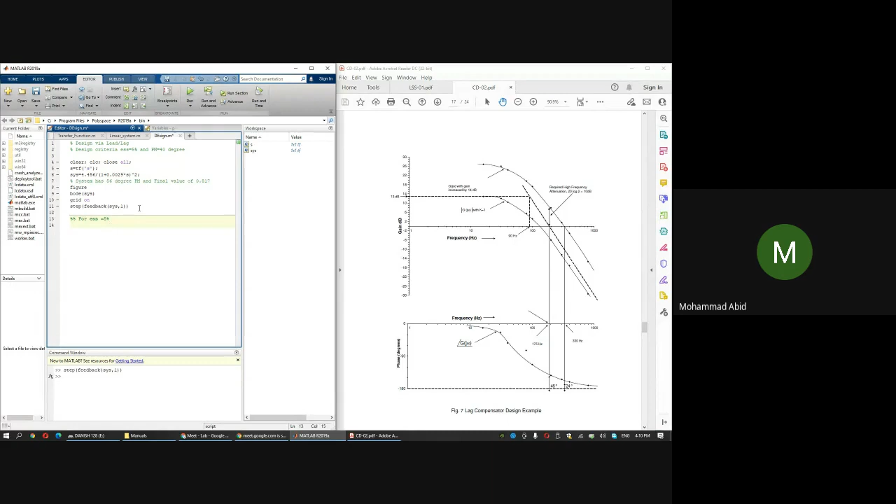Let me just, for your ESS to be 5%, see, what I have to do, जो आपको open loop बोल रहे हैं, and I explained this in lab specifically कि जो आपका design रहता है उसके दो components रहते हैं. The first component is to correct the steady state error, and second component is to correct the phase margin. Now we will divide the design into two parts. First part we will just correct the steady state value, and in the second part when we switch to phase margin, we should not disturb the design for steady state value. That thing has to be kept in mind.

And first I am going for steady state. I will not care for phase margin right now. I will just improve the steady state to 5%. ये कैसे करेंगे? जो आपको open loop बोल रहे हैं उसका magnitude you have to increase by 19 by 4.466. Now how come this value comes? This 19 is basically, for a step input we are talking. So steady state error for a step input of a type 0 system is 1 upon 1 plus Kp, if you remember. I don't know if I have this table here. Somewhere वो table था.

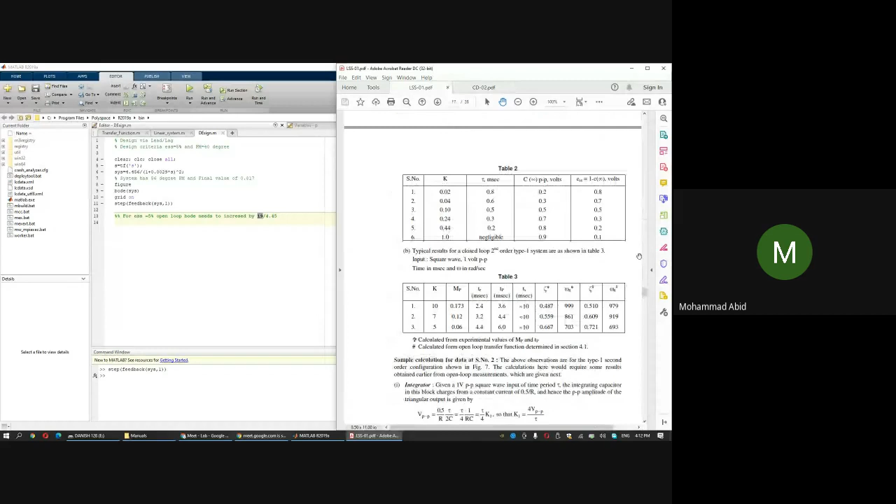This one. For a type 0 system and for a step input, you are having the steady state error as 1 upon 1 plus k. And this thing I'm equating to 0.05, because I have to make this thing 5%. This is my design. So when I equate this thing to 0.05, the value of k that I will need is 19.

Ab 19 to mera value aa gaya. How much gain I have to increase? I will not have to increase 19. I have to increase a fraction, 19 upon the gain already present in the system, which is 4.45. And from here I will get a constant. Let's suppose this is 5. I have to increase the gain of the open loop Bode by 5.

And in the Bode plot, we don't use gain as very simple constants. We use dBs. In dBs, that's around 14 dBs. Okay. 20 log of 5 is... no, this is not correct. Something is wrong there.

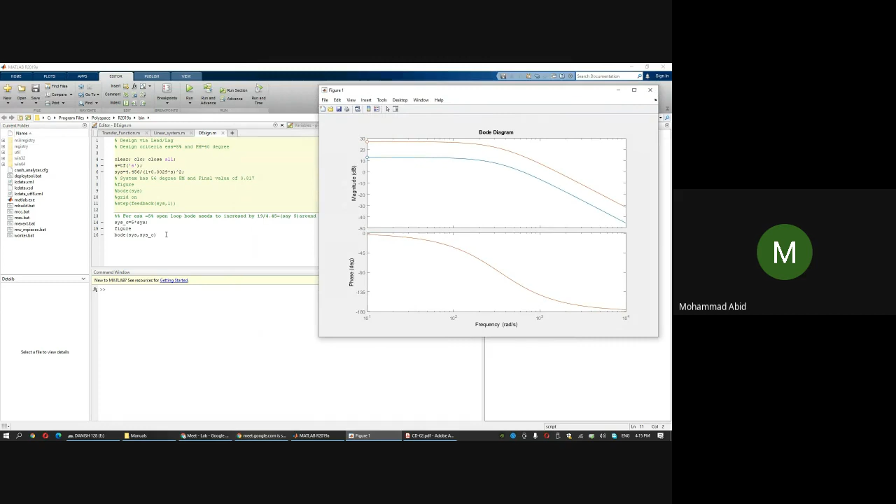Now, have I improved my steady state error? I can verify. I can go again to the step of the feedback command of the new system. The new system is system_c, comma 1. See the steady state value 0.95, which means 5% error.

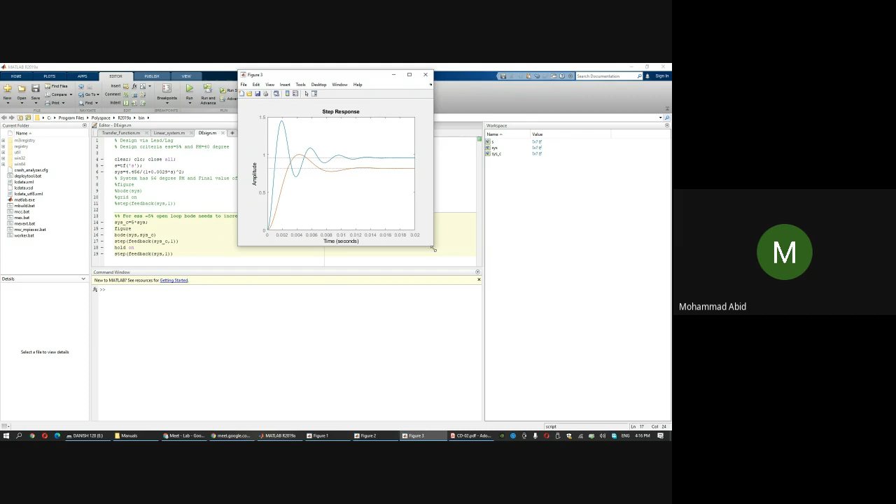If I plot side by side, if I use the command hold on, and plot the previous system also, the old system without C. See, this was my older system, in which 0.817 was the final value. Now I have changed it to 0.95, which means I essentially improved the steady state value. But still we are having 5% error. See, this is 5% away from 1. That was my design. My design was to make it 5% or less.

Okay, that's step 1. Now step 2 of the design is to make the phase margin equal to 40. If you see from the Bode plot, my phase margin initially was 54, if you remember. But since I have increased the gain, this orange is basically the compensated, and the blue is uncompensated. Orange is the compensated one. So I've increased the magnitude.

So this gain crossover frequency, which is here somewhere. This was the earlier gain crossover frequency, 640 radian per second. And I have shifted that to here. Now, because the magnitude went up, the gain crossover frequency has shifted from this point to this point, which has dropped my phase margin. My phase margin earlier was 54. Now my phase margin has dropped to 24. This is because of the addition of gain in the system. But I want it to be more than 40.

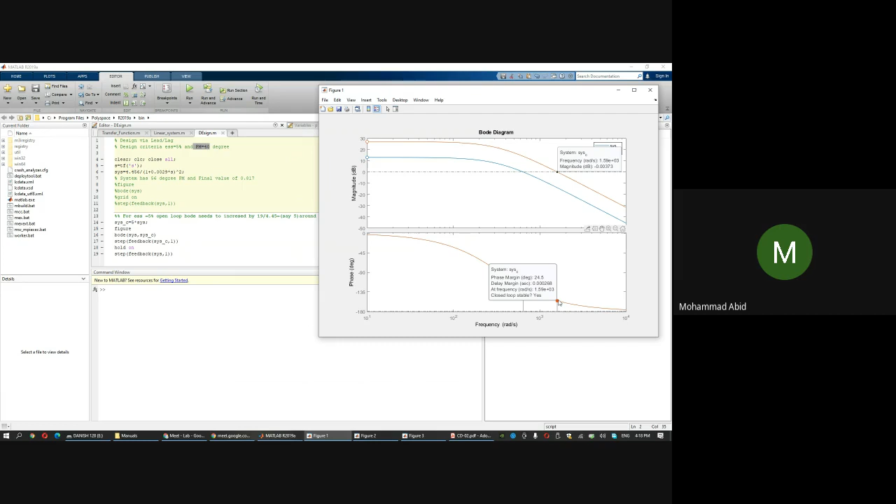So now we will design a controller which will bring it up to 40 or more. But it should not disturb the steady state value, which is the 5% steady state value. For this, in the lab we saw 2 techniques. The first technique we saw was for designing what we call a lag system, and another we saw as lead. There are 2 options to do that.

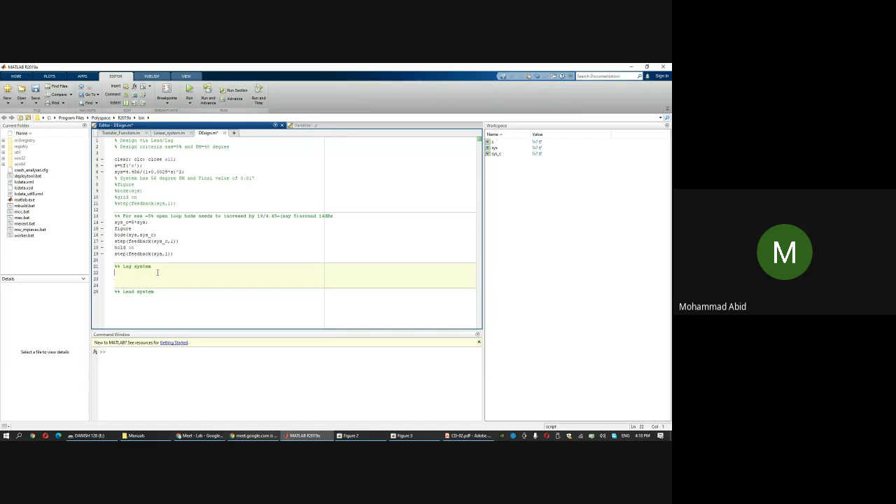ठीक है? So मैंने जो design philosophy है उसको मैंने explain किया था in detail in the lab कि how do you design a lag system to compensate for the phase margin, and how you design a lead system to compensate again for the same. These are 2 different approaches to do the same thing. Very quickly I will just write the transfer function or the value.

See, for a lag हमारे पास जो आ रहा था values, these were the values that we get, और जो lag की transfer function रहती है, that was given here. This is the transfer function for the lag. For lag, let me just write the transfer function. So I have to store the t and beta. So for lag, I will store my beta. And if you go back to the notes or the lecture, the values that we derived in the lab were these.

Okay. And the lag के लिए जो हम transfer function लिखेंगे, that is t into s plus 1, then divided by beta into t into s plus 1. I have written basically this transfer function for the lag. Okay, this is a transfer function of the lag with constants beta and t.

How we obtain this beta and t? This comes from the design philosophy. You can again refer back to the video where we derived these values. But यहाँ पे मैं बस समझा रहा हूँ कि how you can use MATLAB to do these kind of things. यहाँ पे बस मैं पहले verification दिखाऊंगा, then we will just see how you use MATLAB for those things.

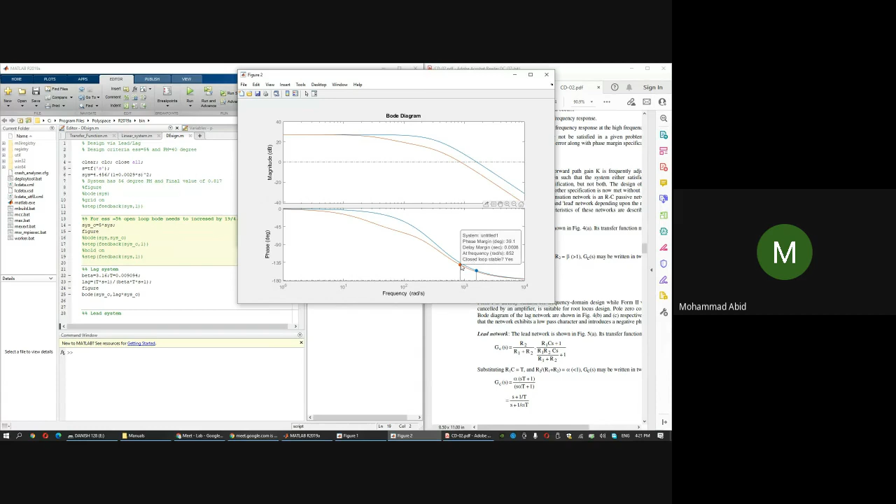24, 39.1. ये जो difference आ रही है, it's not 40. ये जो difference आ रही है, it's because कि हमने transfer function जो ली थी, जैसे सना ने कहा था कि you just change this. हमने class में जो लिया था, it was this. But this manual में जो है, it was a little bit different. एक difference थी on the denominator. The transfer function was 0.00176, and here it's 0.0029.

And for the lag, I'm taking the value suggested by the manual. So let me just quickly write this. यहाँ पे मैं इसको. But design philosophy will be the same. Okay. See if I run this now. Run this now. This passes my 40 degree test.

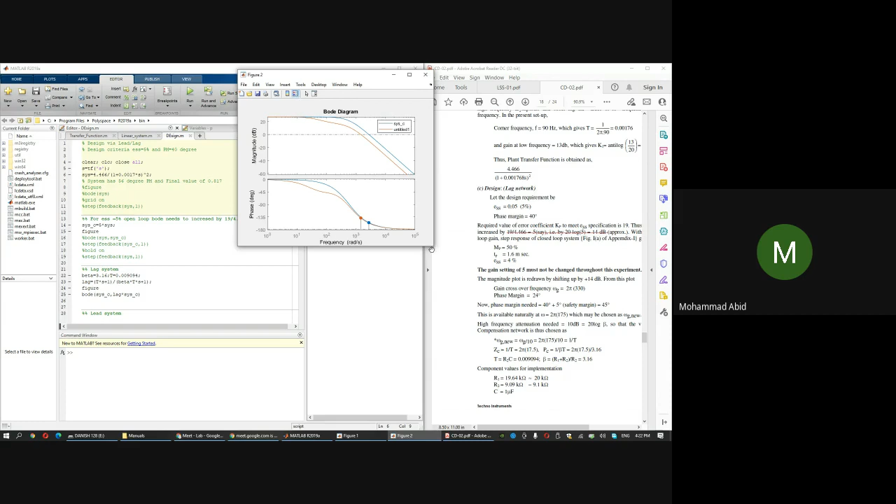So by the effect of lag, what I have done is basically I've improved my phase margin from 24 to 40, and at the same time I have not disturbed my steady state error. See, magnitude में जो steady state error, that's again the same. So I'm expecting if I take the feedback and I take the step response, the steady state error still will be 5%. One other approach was to go for lead.

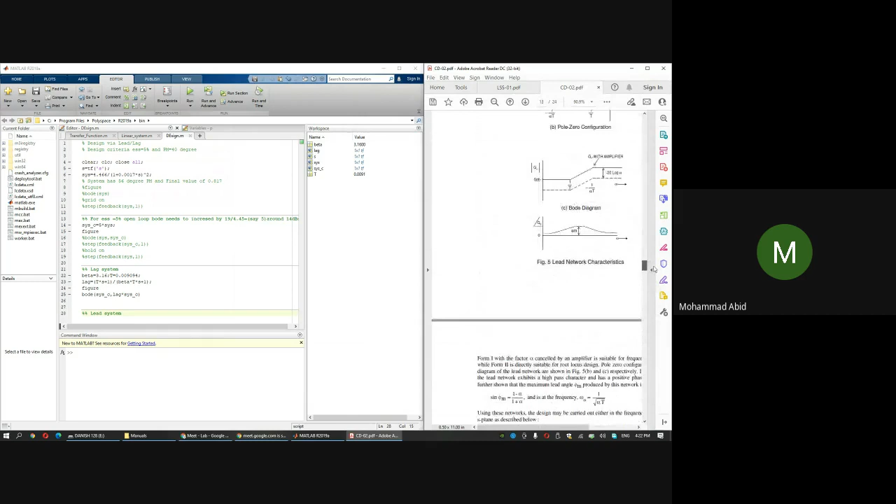Lead के लिए, see, this was the transfer function of the lead. Transfer function of the lead is somewhere here. See, if I take the transfer function, I have to define first this alpha and t. So alpha is 0.39 and t, I will call TA. If I remember 1648 or something value that we were getting. And the transfer function of lead is defined in a similar fashion.

Alpha into s into TA plus 1 over alpha into s into TA plus 1. See, this is the transfer function of the lead. And again, you have to do the same thing. Plot the Bode plot of everything that you have till now. Bode plot of the compensated system, 5%. Bode plot of lag first, lag with the system, and Bode plot of lead now with the system.

Just commenting this figure. यहाँ पे मैं सब कुछ plot कर रहा हूँ. I'm plotting the 5% error, the lag compensation, and the lead compensation. Okay, and let me just quickly run the legend, ताकि आपको, this is a steady state 5%, this is lag, and this will be your lead. मैं बस comments डाल रहा हूँ ताकि आपको visualize हो जाए.

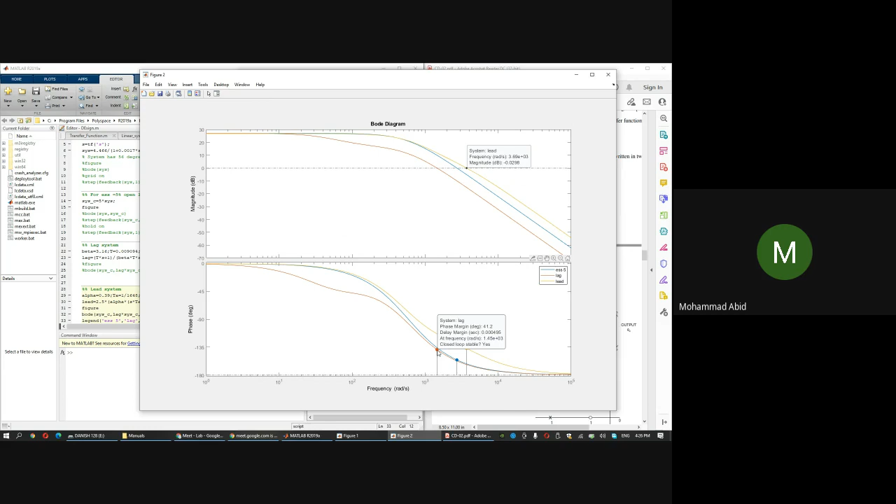In MATLAB, if you don't know the design, let's say आपको पता नहीं है constants कहाँ से आए, transfer function कहाँ से आई, you can use MATLAB to design things. I will just take 3 minutes to show you how you can use MATLAB to design. See, if I write design via MATLAB, we have the system SYS, isn't it? Yeah, the command window use कर लेता हूँ.

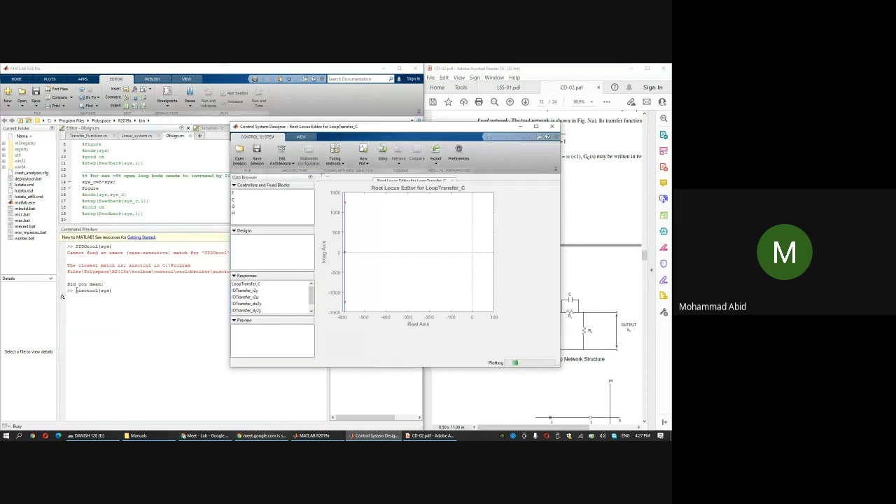ठीक है. So in MATLAB, you're having this sisotool. It's case sensitive. You have to use small sisotool. Very quickly, I will show you. You can look up further details online. This is an app in MATLAB by the name Control System Designer. This opens when you type sisotool of a transfer function. See, this is a very intuitive app.

On the left, you can see the open loop Bode plot. And on the right, you are seeing a step response, and on the top, you are seeing a root locus. ठीक है, 3 plots आपको simultaneously दिख रहे हैं यहाँ पे single system. इसमें कोई हमने compensation add नहीं की है. And this app is used for designing things. यहाँ पे what I will do first, I will just mark some things. I will just write design requirement.

I will add a new requirement, and my requirement is that I should have at least 40 degrees phase margin. ये मेरा एक डिजाइन है, और 5% steady state error. तो ये 2 steps हमने अचीव किया था. पहले स्टेप में what we did is if we go to Bode plot, यहाँ पे characteristics में you can see to improve the steady state value from 0.81 to 0.95, you just have to increase this open loop Bode.

See, I will just drag this magnitude up, and simultaneously you can see the effect on step response and root locus. As I'm moving the gain up, my step response is improving. लेकिन इसमें oscillations भी बढ़ रही है, and I have to stop somewhere. If I stop around here, my steady state criteria is met now. It's 0.96. It has improved, and this is by the way closed loop step response. तो यही हमने किया था. हमने 14 dB का magnitude increase करके steady state error को improve किया था.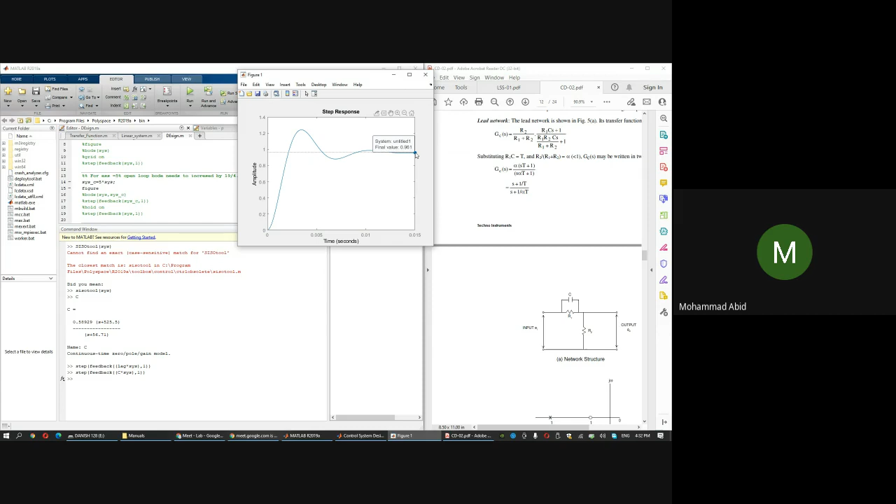Characteristic, steady state, it's satisfying my 5% rule. And if I have to track the phase margin, what I will do? Phase margin I cannot get from step response. Phase margin I can get from Bode plot. So that is Bode plot.

Or just write the Bode simply. Bode of your C times your original system. There should be a plot. Not this one, here. This one.

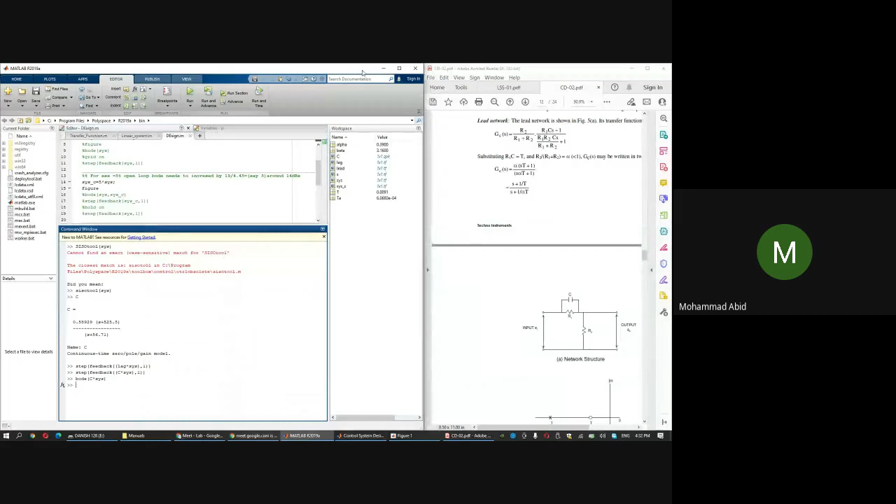We are satisfying 41. So we are satisfying the steady state as well as the phase margin. Similarly, you can do for lead. I showed an example of lag. Similarly, you can use this app to obtain a lead, and you're having a bunch of other things also.

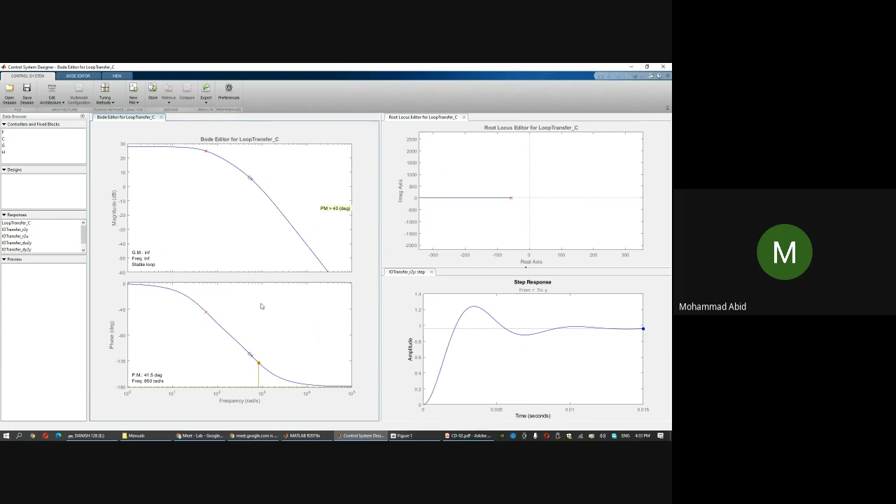So this is how you use MATLAB for design. If you don't know the equations, if you don't know the philosophy of design, you can use MATLAB as a tool for designing or controlling the behavior of a system to any set value. Okay, so by this I conclude this MATLAB session.

By this hour, I have just introduced MATLAB as a tool for the control systems course. And I gave you a little bit of an idea about state space modeling. I showed you some things you discussed in class about controllability and observability and so on. So your exam will be on 1st December.

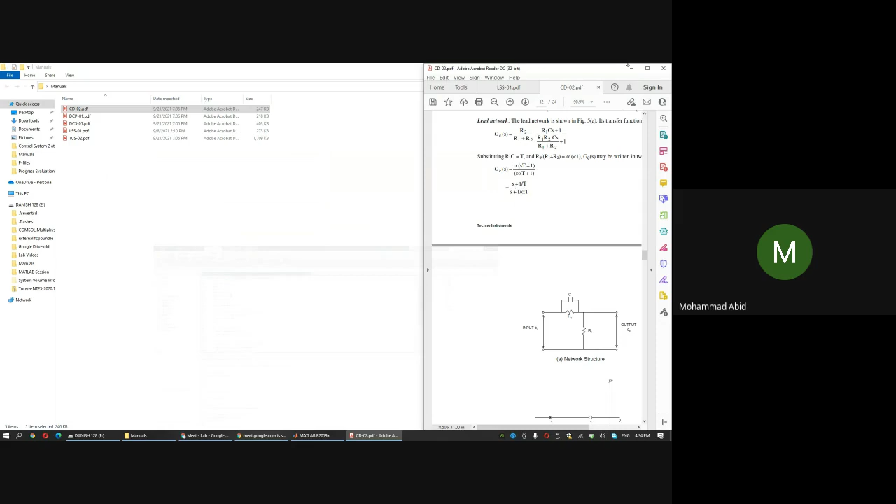Okay, excuse me sir. Yeah.

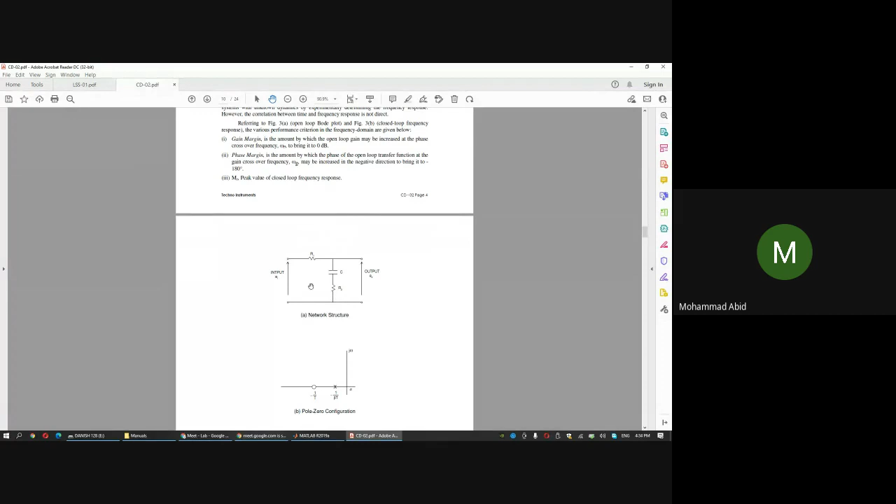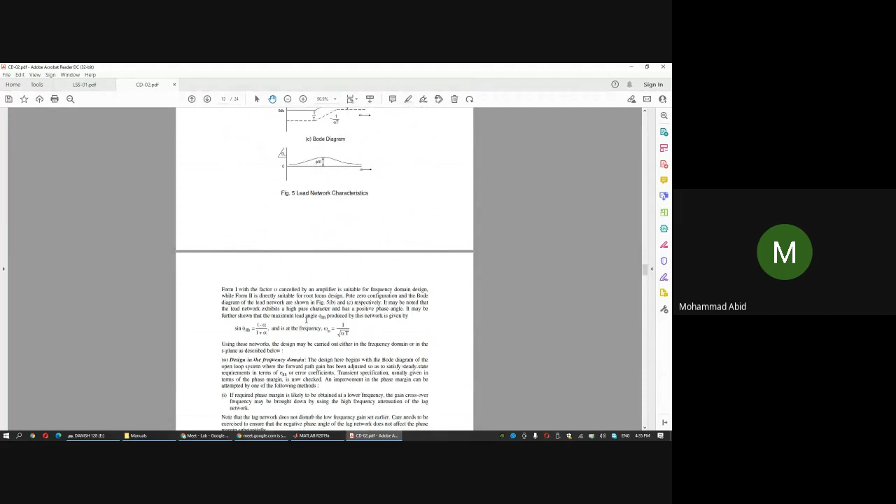Sana, any doubt? No sir. No sir. Okay, okay, thank you so much.